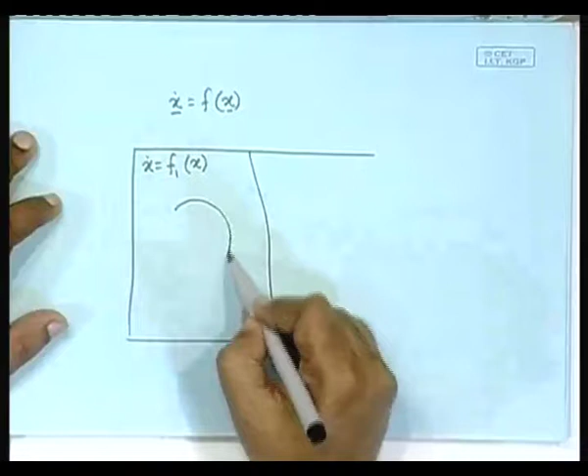And while doing that, if it somehow intersects this, then the equation that governs the evolution of this curve, the state space trajectory, will change to something else. For example, it will then go in some other direction, doing some other thing, and then again when it comes back, again it undergoes a switching and it goes in some other direction. So, you might imagine situations like that where there is some kind of a switching.

Such systems are called switching dynamical systems, also called hybrid dynamical systems. The word hybrid comes in the context where, in the continuous time evolution, there is also interplay between some discrete events, in this case discrete switching events. Now, what happens in such cases?

Now, when we try to understand what happens in such cases, try to picture that such systems will also have to be discretized. That means, you need to obtain some kind of a discrete time description of the system, and we know that discrete time description of the system is obtained by the method of Poincare section.

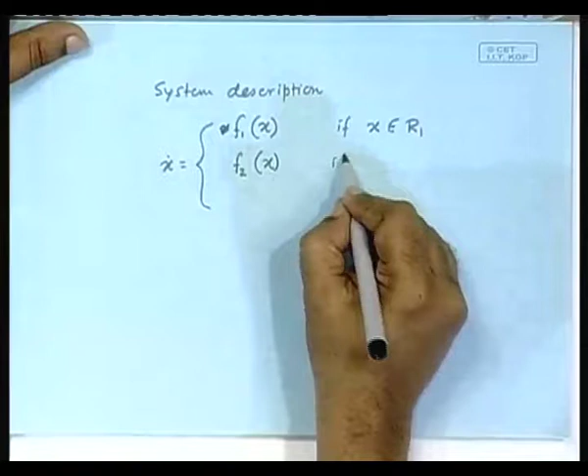So, if there is a system like this, the normal system description would be something like this. x dot is equal to f1 of x if x is in the compartment, say, R1, f2 of x, another function, if the state x is in the compartment R2, and so on and so forth. So, this is the general system description that we are talking about. But first, in order to understand what happens in such systems, let us consider only two such compartments in the state space.

You might imagine what is the practical implication of this. For example, there are a large number of switching circuits; power electronic circuits are switching circuits, where there is an on state of the switch and there is an off state of the switch. During the on state, it follows one set of differential equations. If it is in the off state of the switch, it follows another set of differential equations, and obviously this is the description that we need.

But there are also many other practical examples when this happens. For example, imagine the bouncing ball. Imagine mechanical systems where there is some kind of impact. When there is an impact, it goes a bit to the other side depending on the flexibility of the impacting surface. So long as it is not impacted, it is governed by one set of differential equations, and if it is impacted, it is governed by another set of differential equations.

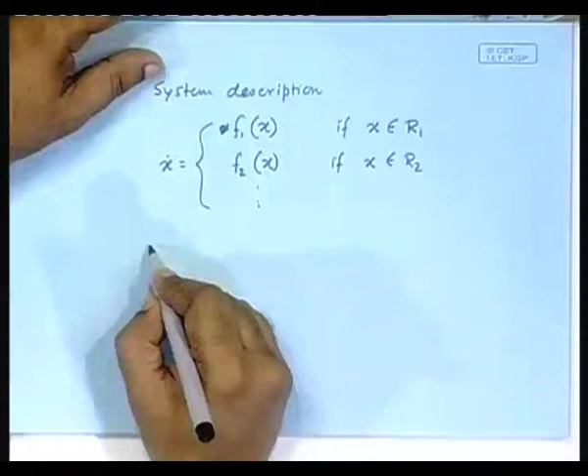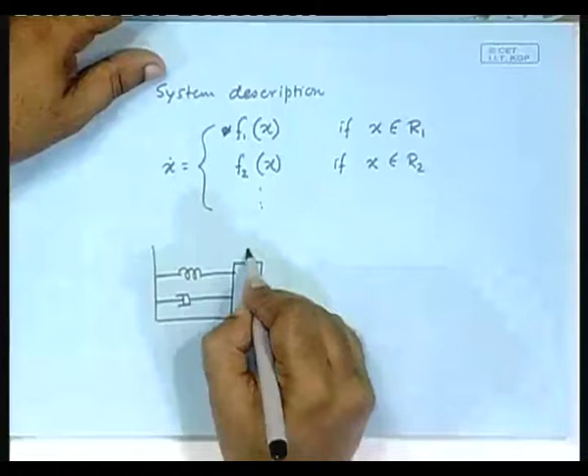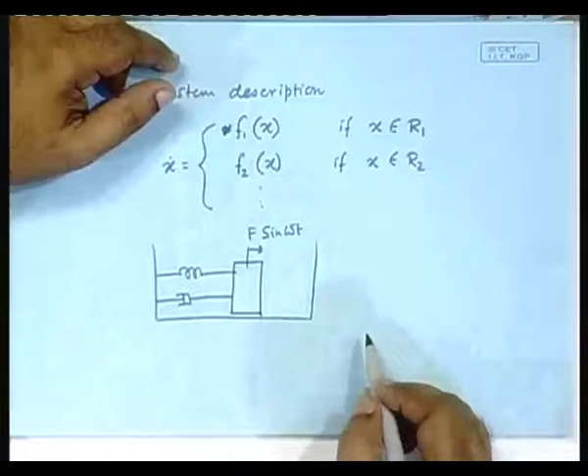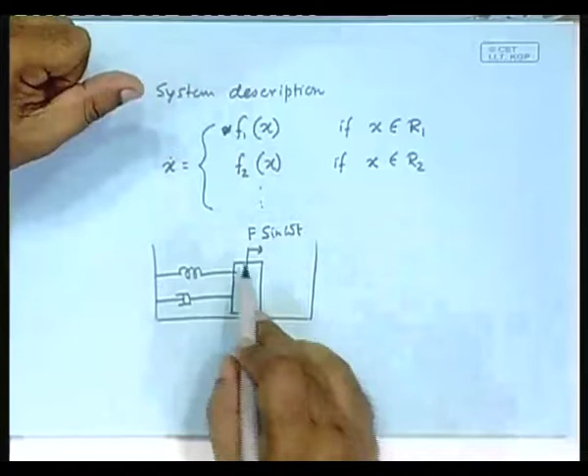Schematically drawing, we would draw it like this. There is one spring and there is one damper connected to a mass, and there is some kind of a force acting, which makes it oscillate back and forth, and there is a wall. So, it could hit the wall and come back. If the wall is rigid, then that will result in instantaneous reversal of the velocity, while if this surface is somewhat soft, then it will go into that, and while it goes into that surface, obviously the system equations change. So, this exactly brings in this kind of description.

You might also imagine the situations of hydraulic systems where there is some kind of closing and opening of valves. So, when the valve is open, it will be one set of differential equations. If the valve is closed, it will be another set of differential equations, and a good example is the human heart, in which there are of course valve openings and closings. There are triggering events; the heart action is started by a triggering action. So, that is also a non-smooth behavior.

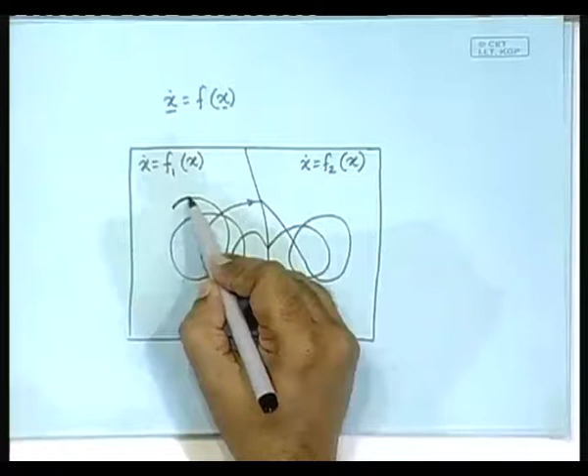So, notice smoothness relates to differentiability. Now, here when it goes within this compartment, at every point this curve is differentiable, right. But the moment it hits and goes in another direction, at this point it is not differentiable. So, at this surface, the switching surface, the behavior is called non-smooth. This word non-smooth should be understood. It means that it is not differentiable on a specific surface or a switching plane.

If the original system is n dimensional, the switching plane can be imagined to be an n minus 1 dimensional hypersurface, so that whenever the state comes and makes a contact with that hypersurface, it goes into another set of differential equations. So, how do we analyze such systems?

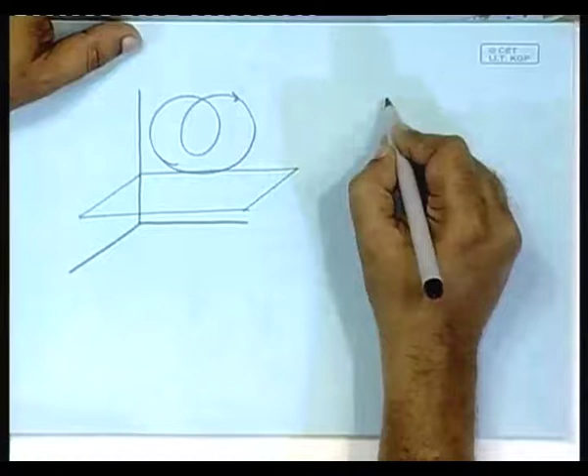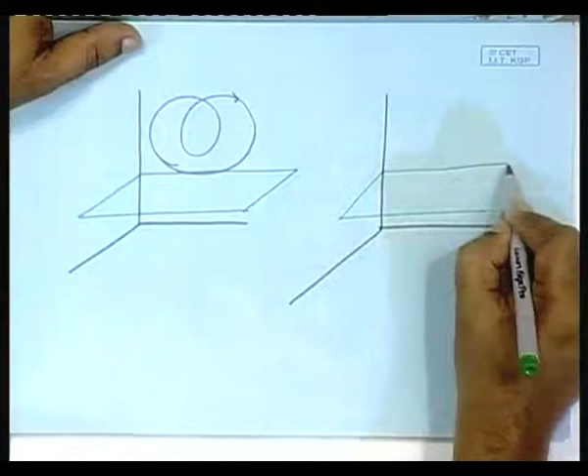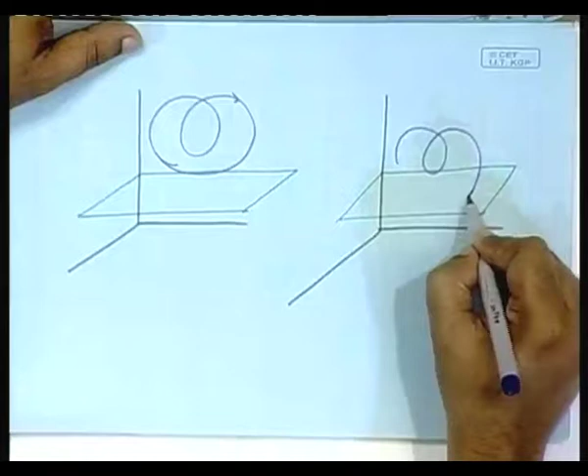But you might also imagine a situation where the orbit is something like this, but it intersects, goes to the other side, comes back and then goes. Now, what is the difference between these two? Obviously, the difference is that it has intersected the switching surface, gone to the other side and come back, and that is how it completes.

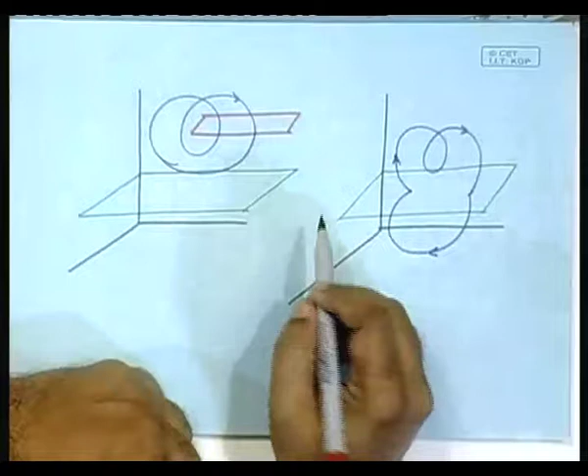Now, in both cases, you might place a Poincare section. For example, if you place a Poincare section here, then you will see the mapping as this point mapping to this point, and you would get some kind of a functional form of this mapping. Now, you might not be able to obtain the functional form in closed form, but nevertheless you know that there is some function that maps from this point to that point. Now, if you do the same exercise in this system, you would place the Poincare section here, and you would now talk about the map from this point to this point.

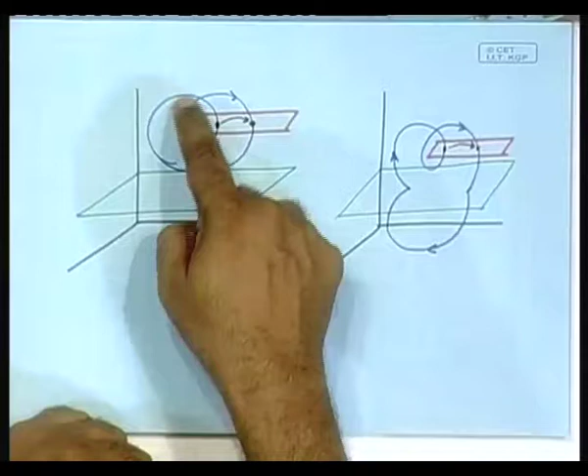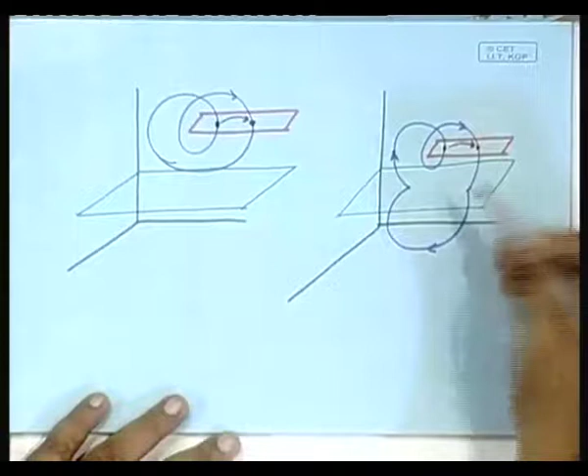Now, just try to understand logically, if you think that there is some kind of an expression for the map, will the two expressions be the same? Obviously not, because in going from here to here, what happened? It went through this and it landed up here, right? While in going from here to there, it goes like this and it comes here. So, all through it goes through one set of differential equations, while in this case, in going from here to here, it comes here, goes across the switching surface, and there is another set of differential equations that describes its evolution, and finally it comes here again.

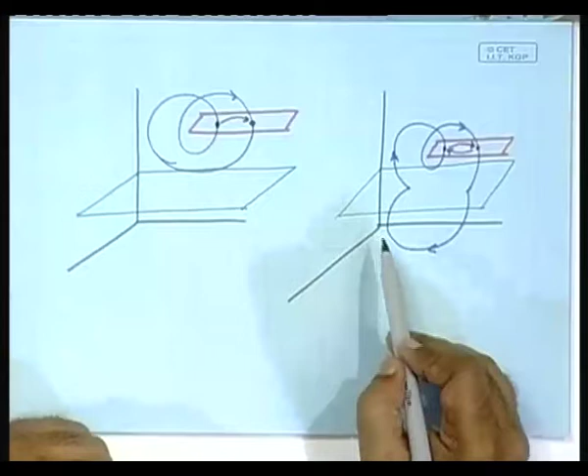So, obviously, in order to find out the map from this point to this point, you would need much more complicated things to be performed, and obviously the functional form will be different. Now, these two different functional forms will have a critical value, where, let me draw on another piece of paper, you might imagine that starting from a point, it just grazes and goes. It does not go to the other side, it just touches, but does not really go to the other side. This orbit will be a critical behavior between these two types of behaviors,

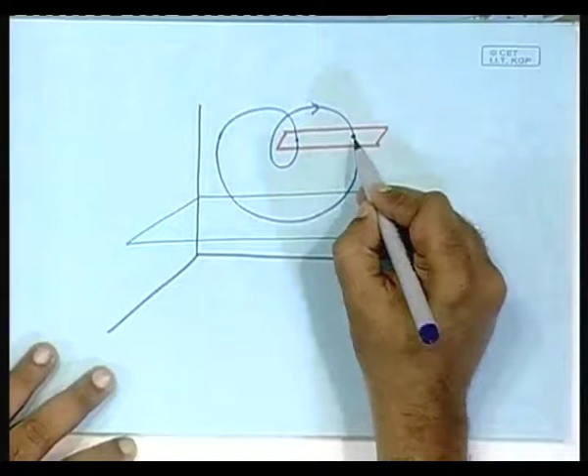and if you place the Poincare section now, it is not difficult to realize that starting from this point, it maps to this point, meaning it goes like this and comes back here. Okay. If you started slightly this way, then it would have not grazed. If you started slightly that way, it would go to the other side and come back. So, this point is sort of a critical behavior between these two different types of behavior, and it is not difficult to see that there can be many such points.

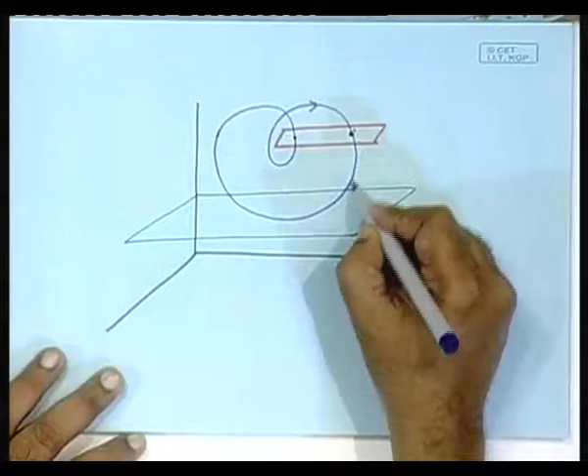That means, there can be another point here which will also have the property that starting from here it will graze and come back here, starting from another point it will graze and come back here. Therefore, there will be a line that will divide these two types of behavior. In this part, it will go to the other side, that means it will undergo the switching. Starting from this side, it will not undergo the switching. And the functional form in this part will be one type like this, and the functional form in this part will be another type like this.

What does it all mean? It means that at the end of the day, you have a discrete time state space. If I now blow this up on the next page, it will be some kind of a description like this, where in this compartment x n plus 1 is equal to some function of x n, and in this compartment x n plus 1 is another function of x n, where x are vectors.

All right. So, what is so holy about it? What is so holy about it is that we know that in such a system, as you change a parameter, the location of the fixed point will change, the local linearization will also change, the eigenvalues will also change, so on and so forth. And we know that when the eigenvalues exit the unit circle, cross the unit circle, you have

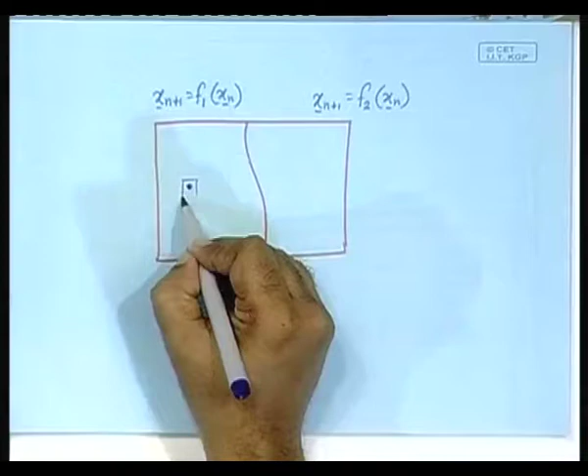bifurcations. So, it might happen that the fixed point is here, and as you are changing the parameter, you are always keeping track of the local linearization and keeping track of the eigenvalues, and as you change the parameter, the position of the fixed point moves, and one of the eigenvalues crosses the unit circle. When that happens, obviously we can explain what happens in terms of what we have already learned.

Why? Because we have already learned that if this is the unit circle, and one eigenvalue goes this way, then what is it? It is the period doubling bifurcation. If this is the unit circle, circle of radius 1, and an eigenvalue goes and hits this way, what is it? It is a saddle node bifurcation.

If you have a unit circle like this and eigenvalues move like that, what is it? It is a Hopf bifurcation or Neimark-Sacker bifurcation, giving rise to the birth of a quasi-periodic behavior. These are all known. So, if similar things happen while the fixed point is in one compartment, we know what happens. But there is also the possibility that with the change of the parameter, a fixed point may come and hit the border, and maybe it goes to the other side.

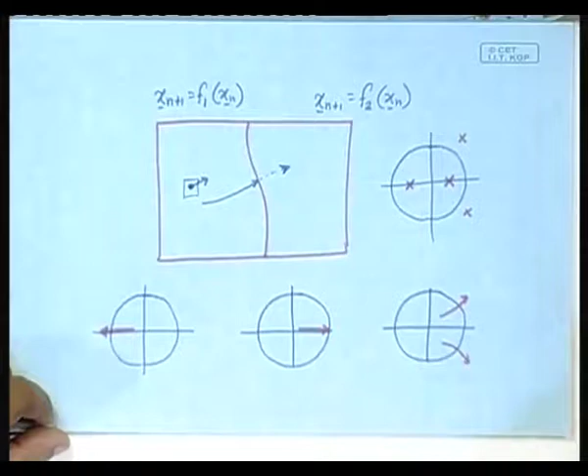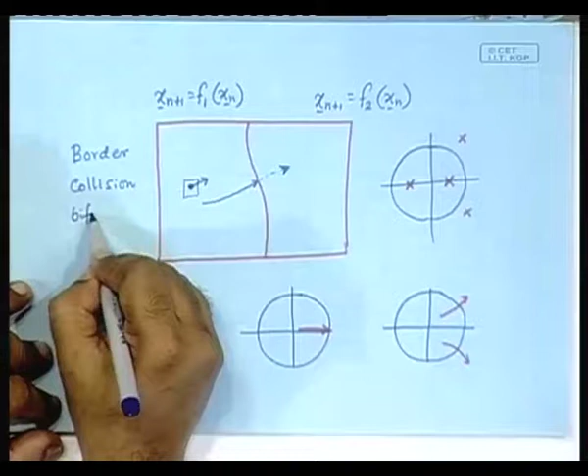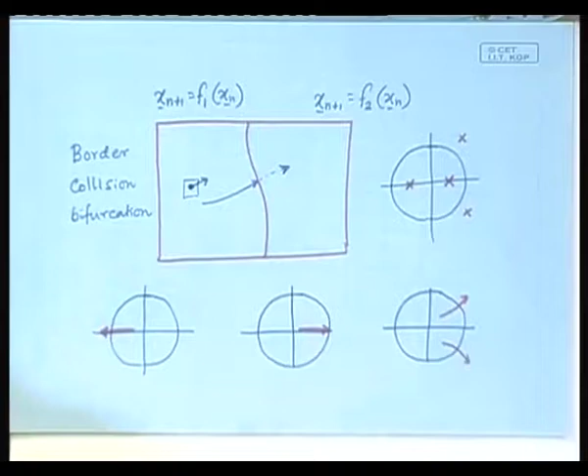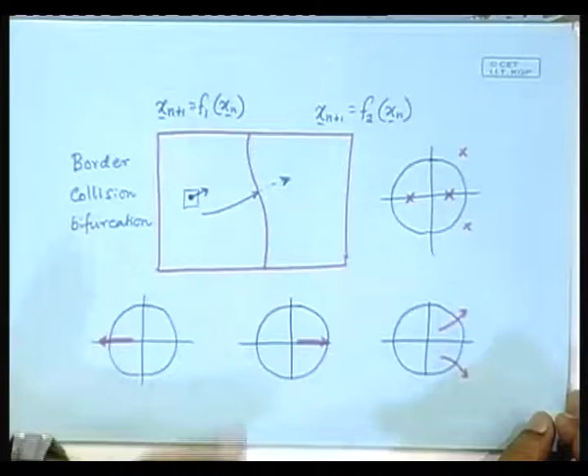All right. Fine. So, let me give an example now. Well, this is a 2D description. Since I have drawn it in 2 dimensions, it means that x is a 2-dimensional vector, x and y. So, here you would say x, here you would say y, and so on and so forth. But there may also be situations where it is just 1-dimensional.

In that case, what does this picture look like? In 1 dimension, you can draw the graph of the map. Say this is x n and this is x n plus 1, and suppose this is the border. That means, for these values of x n, it will have one functional form. For those values of x n, it will have another functional form. So, suppose so long as x n is less than this value, the behavior is something like this, smooth, but at this point there has to be a non-smoothness, the character has to change. So, it might be like this, all right.

So, it is not difficult to see then that in 1D also such things can happen, and let us start to work on this kind of idea, because one dimension is easier to understand because you can draw a graph. But first let me give a very simple example, one that probably I have already done, but nevertheless for this context let us repeat. Let us consider the power electronic boost converter, where you have got a battery, an inductor here, and a switch here.

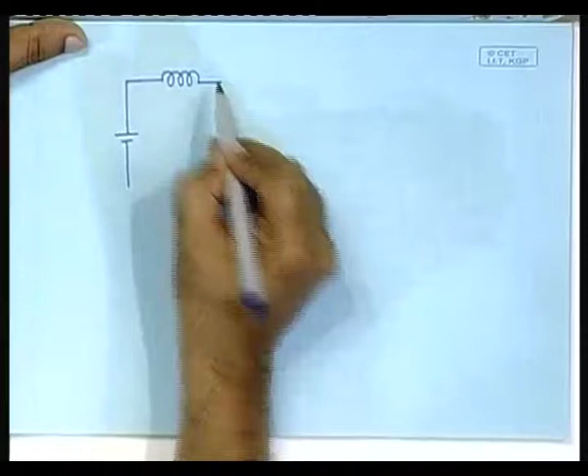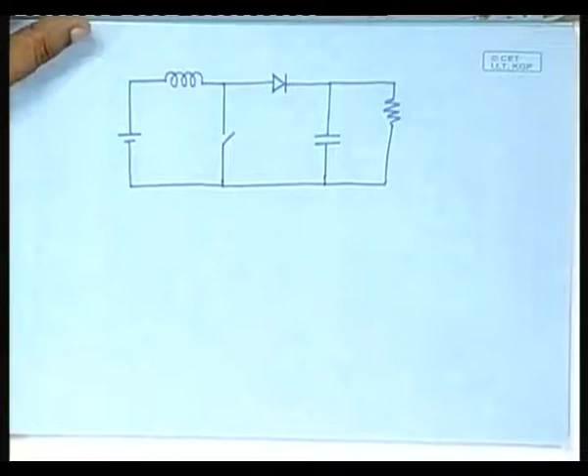Here is a diode, here is a capacitor, and here is the load resistance. This is a load. Now, from this explanation you should recall what happens when the switch is on and off.

When the switch is on, the current through this loop builds up, because the voltage is connected across the inductor. So, the current builds up linearly, and when the switch is off, the whole circuit is connected and the diode is forward biased. So, the current will flow like this, and the energy that has been stored in the inductor will then go to this RC network.

So, the energy shifts from here to here, the energy in the inductor drops, and the inductor current as a result falls. If the inductor current falls, then L di/dt will have a different sense. So, if this was positive and this negative, this will become positive and this negative. As a result, this voltage and that voltage add up, which appears across the load. So, the load sees a voltage bigger than the input voltage. That is the concept of the boost converter.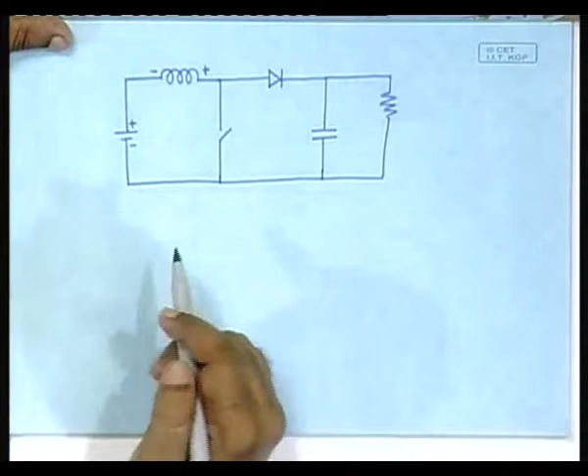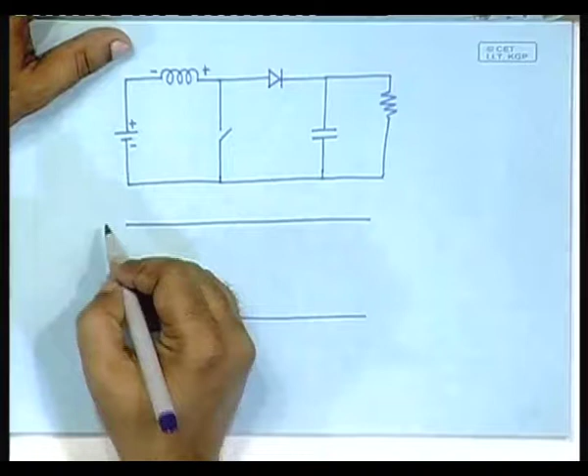Now, often the control of the switch is done by what is known as current mode control. I am not showing the circuit, but let me illustrate the principle with a diagram. Suppose I am drawing the current waveform, this is the 0 level, and there is a reference value, I reference. There are also periodic clocks, so let me draw the clock instants all through, so that it is clear.

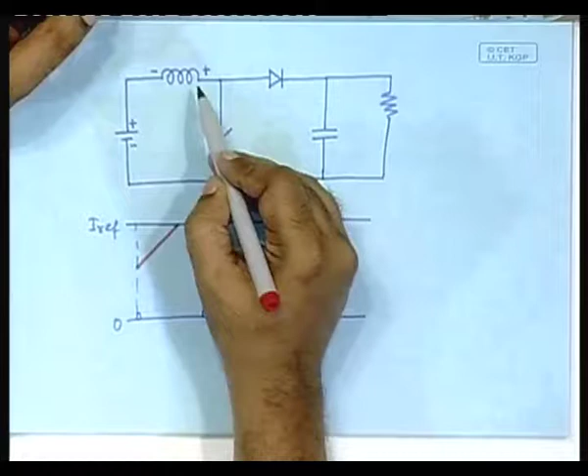Now, at a clock instant, the switch is turned on. So, the inductor current goes up, and when it becomes equal to the I reference, the switch is turned off, which means it goes like this. Again it turns on, again it turns off, again it turns on, again it turns off. Let me draw some more.

Again it goes, but now imagine that it does not reach the I reference before the next clock comes. In that case, it stays on, and then it turns off, and so on. So, that is the kind of switching logic that is followed, and this red line would be the current through the inductor.

Now, suppose I want to obtain the discrete time description of such a system. How will you do it? We will have to sample it, because this is a non-autonomous system. There is an external clock, and we have learned that whenever there is an external periodic input, it is a non-autonomous system, and the discretization has to be done by placing a Poincare section in synchronism with the external periodic input. So, we observe from this point to this point to this point and so forth.

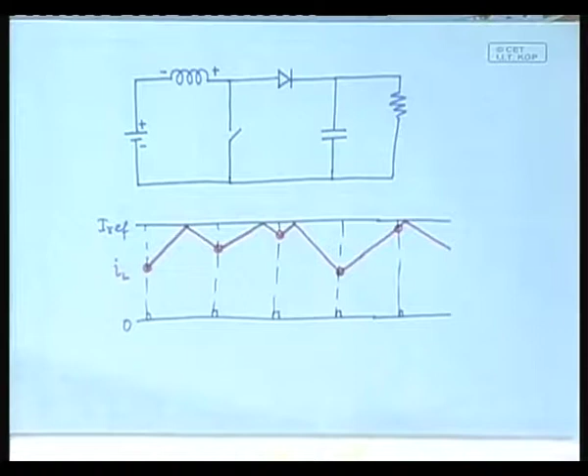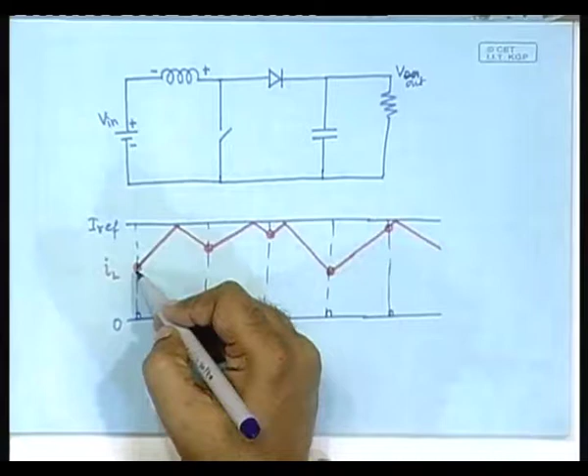Now, it is not difficult to see that if the capacitor is large, the voltage here would be held almost constant. If we proceed under the assumption that the capacitor is large, and therefore this voltage V out, with V in as the input, is more or less constant, then this will really be a straight line, and the straight line will have a slope of V in by L.

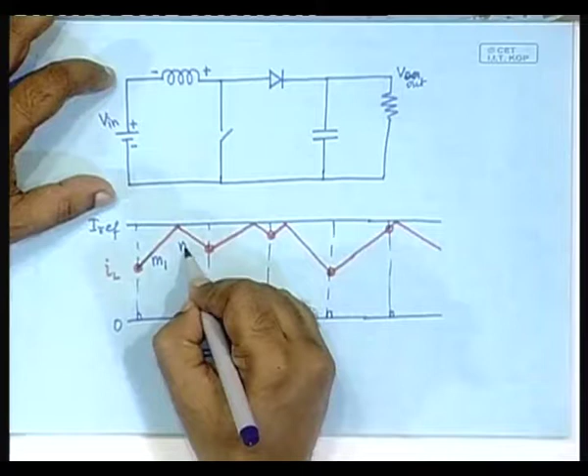So, here the slope is M1, where M1 is equal to V in by L, and here when it drops, it is V out minus V in by L. So, here the slope is M2. In that case, if you try to obtain the discrete time description, recall we have done that already. How will we proceed? We will first have to obtain this time. Is that visible? Yes.

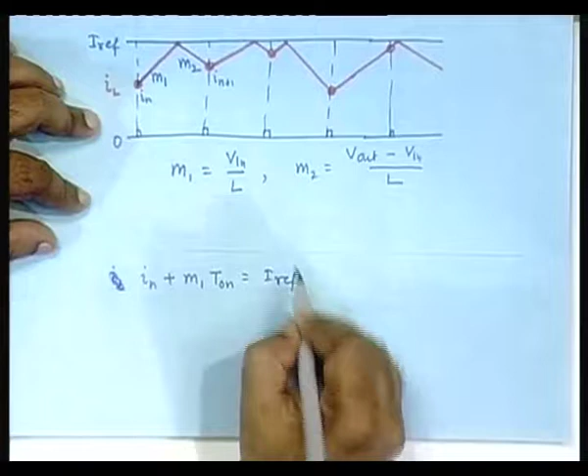So, we will say I L at the nth time instant is I n, and we are trying to find I n plus 1. I n plus M1 T on is equal to I ref, since it has reached I ref, which gives me T on. So, how much is the off time? That is the total clock period T minus T on. So, T off is equal to T minus (I ref minus I n) by M1.

Then what is the final value? I ref minus M2 times T off. So, I n plus 1 is equal to I ref minus M2 T off, which is T minus (I ref minus I n) by M1.

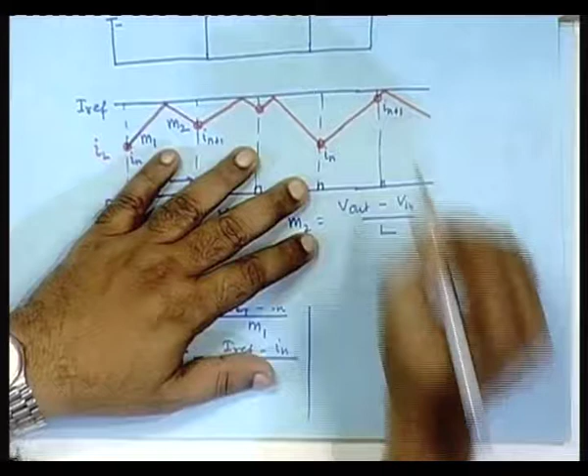Okay. But this is only half of the story, because there is also a possibility of evolution like this, which means that it does not reach the I reference before the next clock. Now, if that is happening, in that case, if I take this as my I n and this as my I n plus 1, then what will be the I n plus 1 in that case? In that case, I n plus 1 can be straightforwardly written as I n plus M1 capital T.

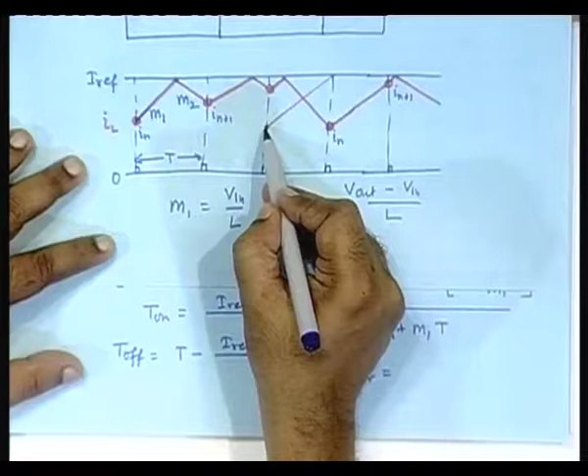So, you can see that there are two possibilities, one where the map will be given by this, two where the map will be given by this, and the critical distinguishing behavior would be one where starting from a point here, it reaches exactly at the next clock. So, I will say I border is, can you say what will be this value? It is essentially that value to which I will add M1 capital T, and I will reach I reference. So, this is I ref minus M1 T. Okay.

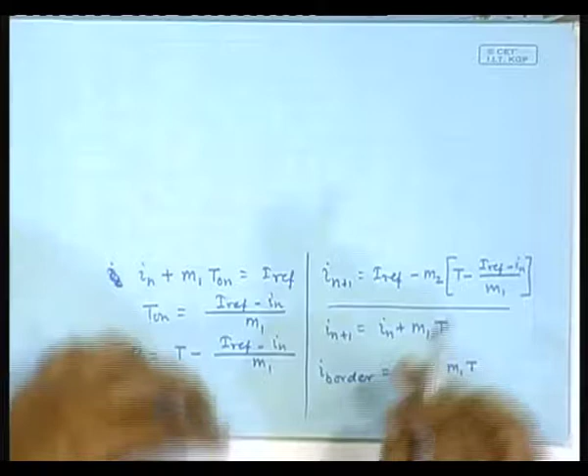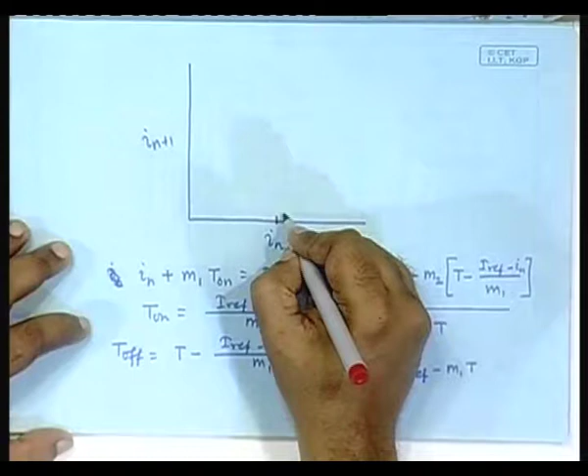Fine. So, here you have the final description of the system. These are the two compartments and this is the borderline condition. So, let us draw this graph. I n versus I n plus 1. Somewhere there would be the borderline case, say the borderline case is here. So, this is I border. Below I border, that means if the initial condition is below that, obviously it reaches like this. So, you have to take this equation, I n plus M1 T.

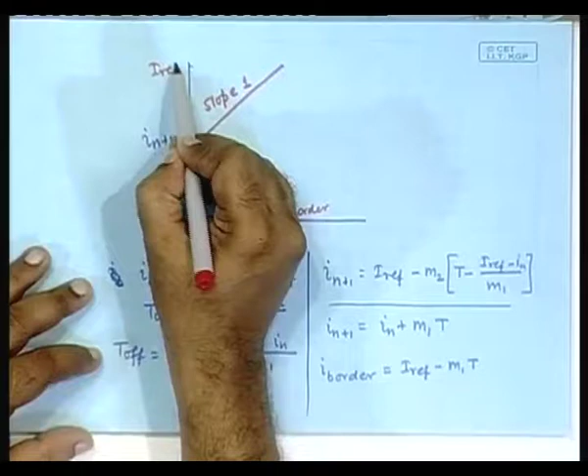What will be the graph like? The slope of the graph will be 1, and plus M1 T. So, it will go something like this. Here the slope is 1. And it will reach I reference. Okay. So, this is the borderline situation where it reaches. So, if you put I border here, in this case you see that M1 T cancels off, you get I reference. So, finally you get I reference.

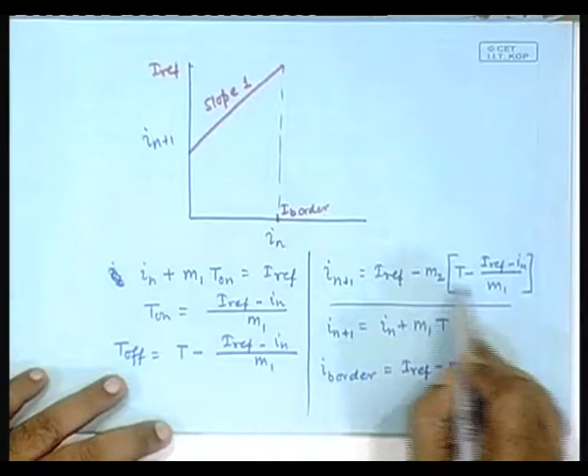After that we have to take this equation. You can see that these all parts are constant, only this one is a variable part where the slope is minus M2 by M1. So, here the slope is minus M2 by M1 times I n. So, it will be something like this where the slope is minus M2 by M1. Good. So, this is the graph of the map for this practical system.

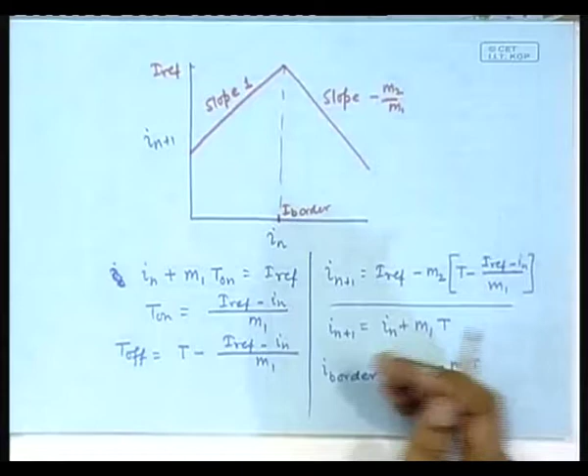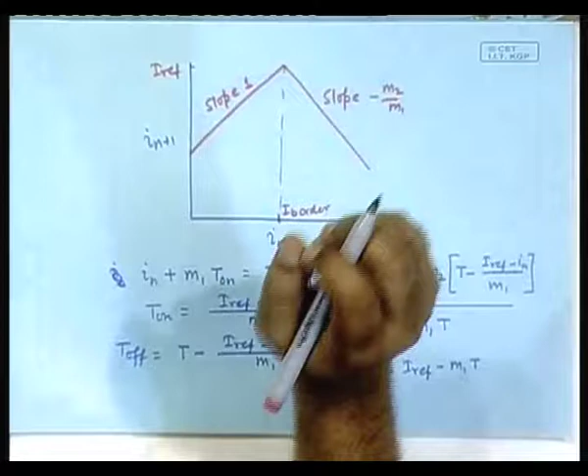See the similarity: we had said that a normal piecewise smooth map would be something like this, only in this case after the simplifying assumption that the output voltage is kept constant, we see that both the sides are linear, but nevertheless it satisfies the definition of piecewise smooth. So, we need some kind of a theory for the bifurcation that will happen when the fixed point will hit the border, that means when the border collision will take place.

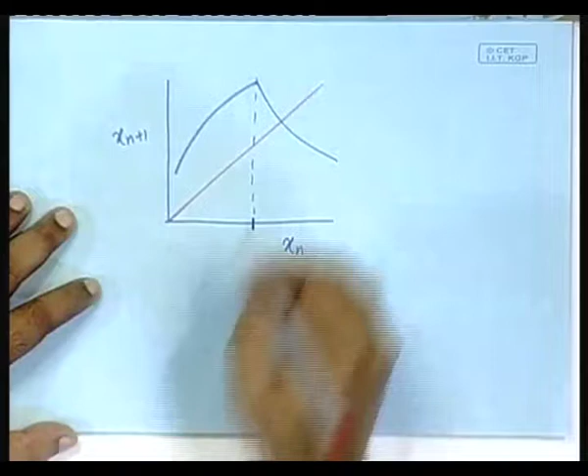Let us see, when will the border collision take place in this case? Fixed point, where is the fixed point? Simple, draw the 45-degree line. So, here is the fixed point. Now, with the change of the graph of the map with the change of the parameter, if it so happens that at some point it changes and becomes like this, then as you change the parameter, you can see that there is a border collision occurring. So, we will try to understand the character of that.

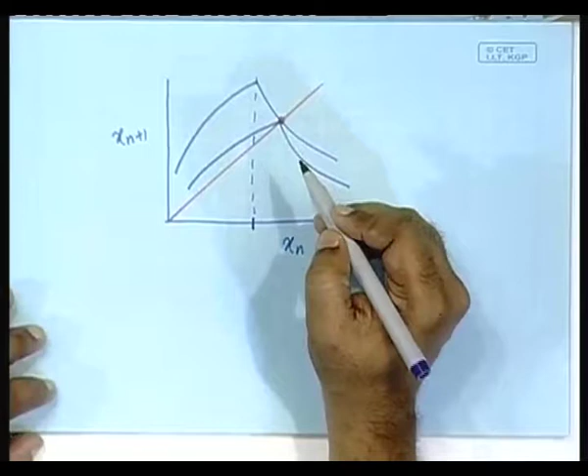Now, it is not difficult to see that the event that will occur exactly at that point is in no way related to the character of the graphs in these parts. It is only related to the slopes here. That means the local linearization in this chunk and the local linearization in this chunk. Okay. In fact, that is what is normally used. It is to our luck that it is already linearized, but in most situations it might not be linearized. So, in order to understand what really happens, I do not need to consider the whole graph of the map, I only need to consider the linearized chunks.

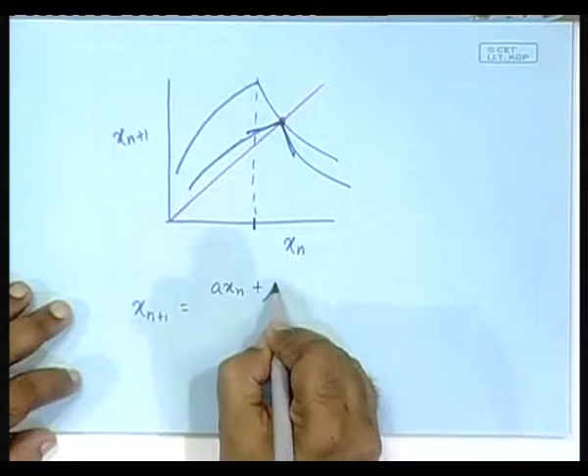And if you make some coordinate transformation, this piecewise linearized map can be expressed as x n plus 1 is equal to a x n plus mu for x n less than 0, and b x n plus mu for x n greater than 0.

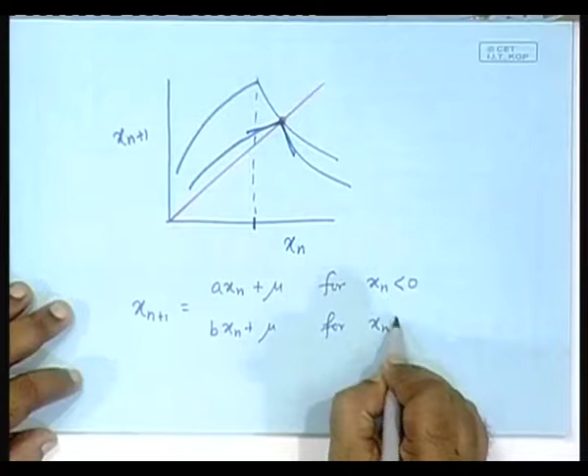That is why this form is called the normal form, because just by using this you can exactly understand the character of the border collision bifurcation, which orbit remains, which orbit exists, which orbit would be stable; all that can be understood just by considering this simple map. So, let us from now onwards consider this simple map.

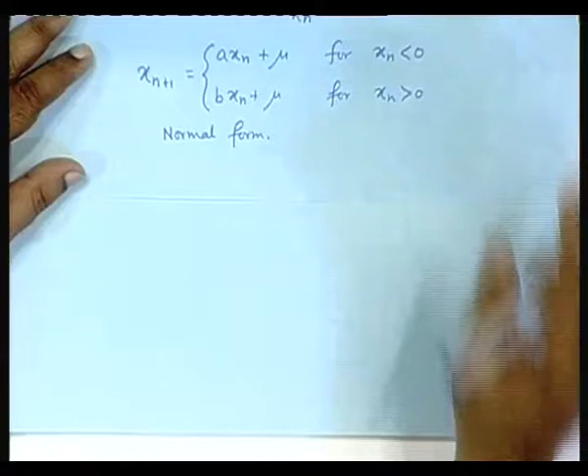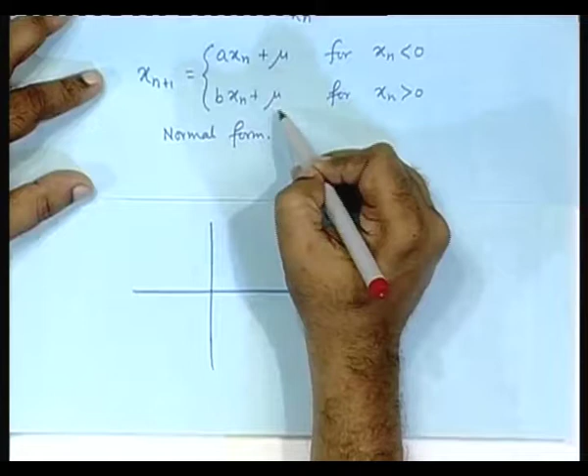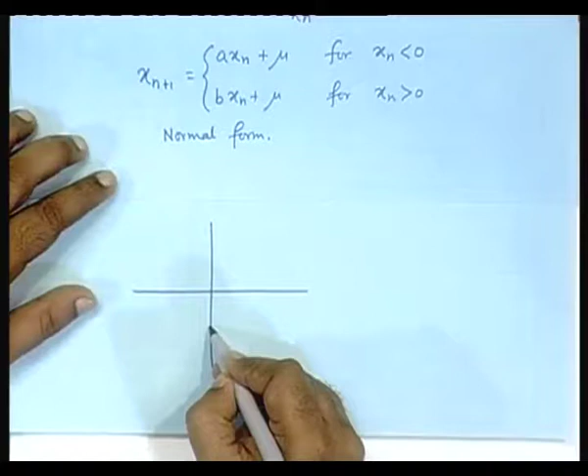Can you see? Yes. Okay. What will be the graph of this map? Obviously, that will depend on A and B, but it is not difficult to see that it will be the graph of the map. Okay, what is the result of variation of mu? Mu is the parameter, and the whole graph of the map goes up and down. So, you might say depending on the value of A and B, the graph of the map is like this here and like that here. As you change mu, it goes here and here.

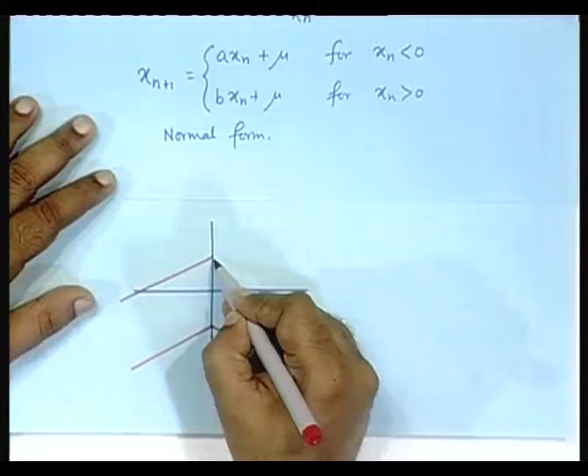So, this point represents the critical value of mu at which, if you draw the 45-degree line, it will be clearer, the border collision takes place. Just look at the result of the variation of mu. Initially, when mu was negative, the fixed point was here. As mu was increased, this graph goes up.

It is not difficult to see that the intersection with the 45-degree line will go closer and closer to the y axis, and at this point, when mu is equal to 0, this is the border line; the fixed point collides with the border line. So, border collision occurs at mu equal to 0, and after that the fixed point moves here. Fine.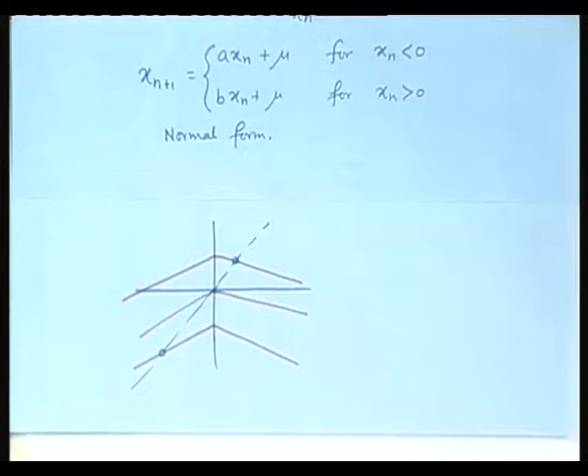So, depending on the value of A and B, we can then identify the different bifurcations that will take place. For example, in this case, what will happen? While mu was negative, the fixed point was given by the slope A, and when mu was positive, the fixed point is given by the slope B, and in this case, the way I have drawn,

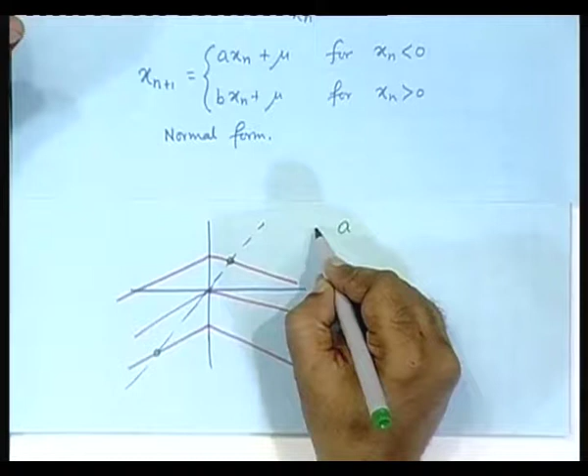A is positive, between 0 and 1, and B is negative. So, in this case we have drawn B as greater than -1 but less than 0. That is how we have drawn it. And in that case, in the bifurcation diagram, what we will see is a stable fixed point, and on the other side also a stable fixed point.

So, if you draw the bifurcation diagram, you will see something like this. This is the bifurcation diagram that I am drawing, not a picture like this. Here it is x n versus x n plus 1, but here I am drawing mu as a parameter which is being varied, and here the x n. You will see that there is a stable fixed point existing for negative values of mu.

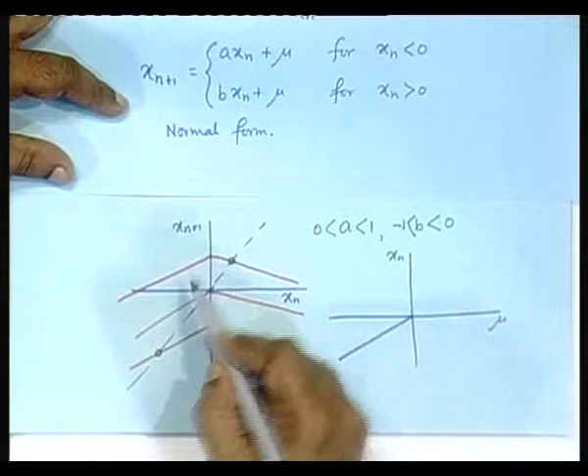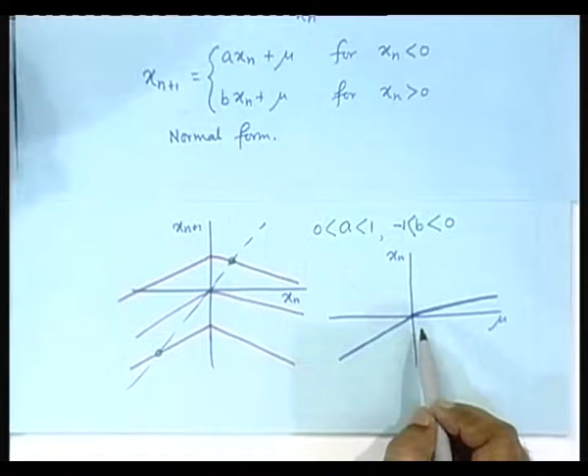So, it will go like this, hit it, and then there will be a stable fixed point existing on the other side also, like so, but notice that the slope will change. So, a stable fixed point remaining a stable fixed point, but the slope undergoing a change. These kinds of events are very often seen. There is a bend in the bifurcation diagram. These are often caused by border collision, but these are not dangerous, because these are situations where the fixed point remains stable.

It is not difficult to see that such situations will occur where A lies between -1 and 1 and B also lies between -1 and 1. Okay. So, we might draw a parameter space with A and B as the axes, and we would say that if the parameters are chosen within the box given by -1 to +1 and -1 to +1, then the fixed point will remain a fixed point.

Good. What if I choose a parameter, say here? Notice where the parameter is: A will be greater than +1 and B will be less than 0, that means negative, but greater than minus 1. So, what will be the behavior? Let us try to figure it out.

A value greater than plus 1. So, B value between 0 and minus 1. Good. Now, you see at this situation there is no fixed point. As it goes up, there will be a time when the graph of the map will look like this. The fixed point only critically starts to exist, but when it has crossed 0,

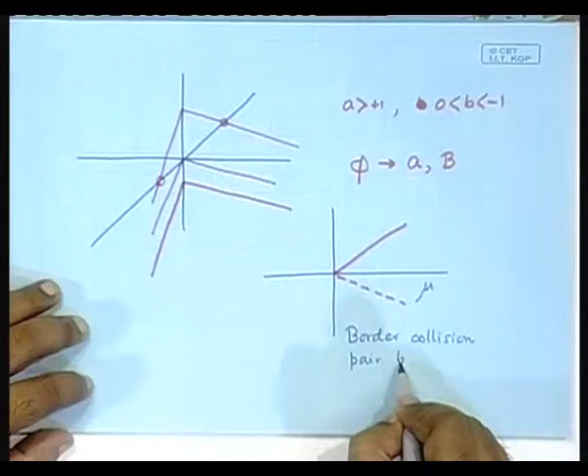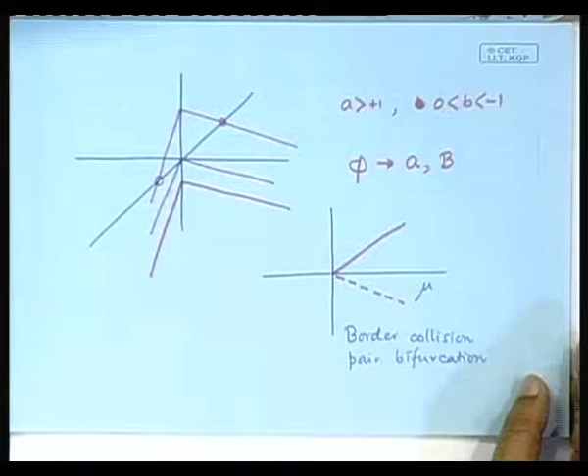Fine. Now, in this part you expect a situation where a pair of fixed points are born, out of which one is stable. So, that is what you will actually be able to see. Now, imagine that you change B to a value somewhere here. So, what is the situation? A is greater than plus 1 and B is less than minus 1. Let us see what happens then.

Now, the situation is A is greater than plus 1, B is less than minus 1. When it is crossed, it will be like this. Notice now two fixed points are born. In this situation there was no fixed point, there was no intersection with the 45-degree line. But the moment it has crossed mu is equal to 0, you will have two fixed points, but both unstable.

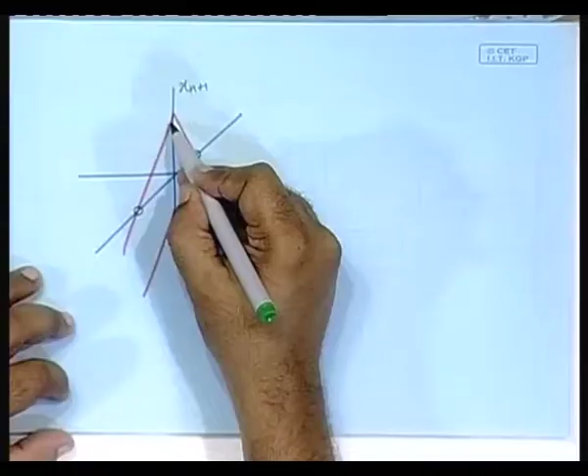Will any periodic orbit occur? No, because if any periodic orbit had to occur, then it will have some iterates falling here and some iterates falling there. For the iterates falling here, there will be local stretching because the slope is greater than 1. This neighborhood, when it maps to here, here also the slope is greater than 1. So, all the neighborhoods will always expand, and therefore, you cannot have any high periodic orbit that is stable, impossible.

Can there be a chaotic orbit? Well, a chaotic orbit will occur only if the orbit is bounded. Will it be bounded? Notice that any initial condition here will tend to go like this. So, it will go away from here. Any initial condition here will tend to go like this. So, it will go towards that. Therefore, there is a possibility of the orbit being bounded, because from this side it goes to the right, from this side it goes to the left. So, obviously, it has a possibility of remaining bounded. If it is bounded, the behavior will be chaotic.

But over the whole range, there is also the possibility that if any iterate falls here, it will in the next iterate go here and will come here. And in the next iterate, if it lands up here on this side, then there is no problem. But if it lands on this side, then it goes out, right. So, there is a critical value. As you keep on changing the values of A and B, there is a critical situation where the orbit may become unstable. Notice what is the kind of instability.

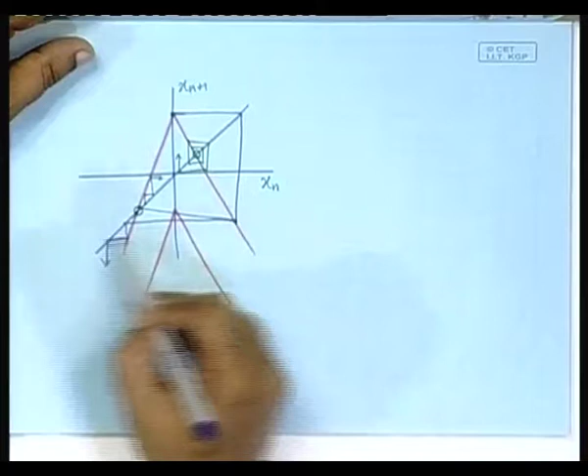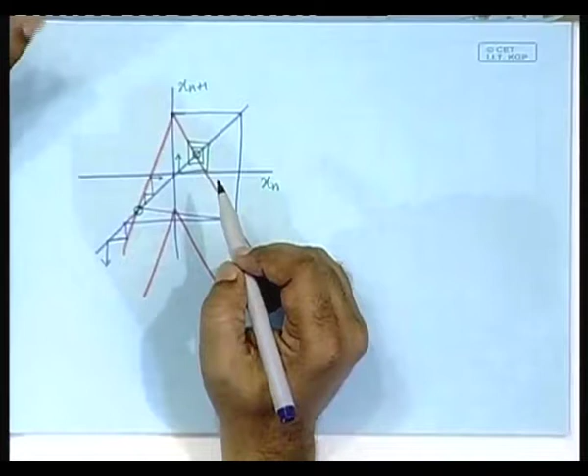That is an unstable chaotic orbit. So, the critical difference between the stable chaotic orbit and an unstable chaotic orbit will be where this point maps to. If it maps to a point outside, it will become unstable. If it maps to a point inside, it will remain stable.

I leave it up to you to find out the condition under which the chaotic orbit will remain stable. Okay. So, you will do it before coming to the next class. It is a very trivial thing, trivial trigonometry to be done. So, we were plotting it here.

In this part we are considering, under some conditions there will be a stable chaotic orbit, and under some conditions the chaotic orbit will become unstable, and as a result there will be no orbit that is stable.

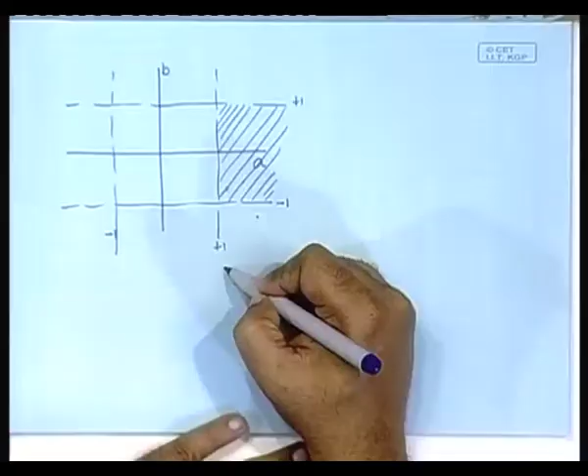And I can tell you, you obtain the condition, it comes to be something like this. So, that in this region you have a stable chaotic orbit. In this part, there is nothing stable. Okay, let us consider the situation here.

Say I have chosen a point here, which means that A is between 0 and plus 1, while B is less than minus 1. A is between 0 and plus 1, like this, and B is less than minus 1, like so.

Notice that for mu less than 0, the fixed point exists. When it goes to the other side, so what is the result? As this mu changes, this whole graph goes up, this point moves this way, and finally at mu equal to 0, this one moves to the other side. There is a fixed point, but it is now unstable. So, at this border collision, the fixed point loses stability.

Okay. But here, since the slope is less than -1, even though it did not go exactly through the -1 point, it jumped across the -1 value, you might imagine that this is something similar to the period doubling bifurcation. But whether the period 2 orbit will be stable or not depends on what? If it is a period 2 orbit, there will be one iterate here, another iterate here. Here the slope is A, here the slope is B.

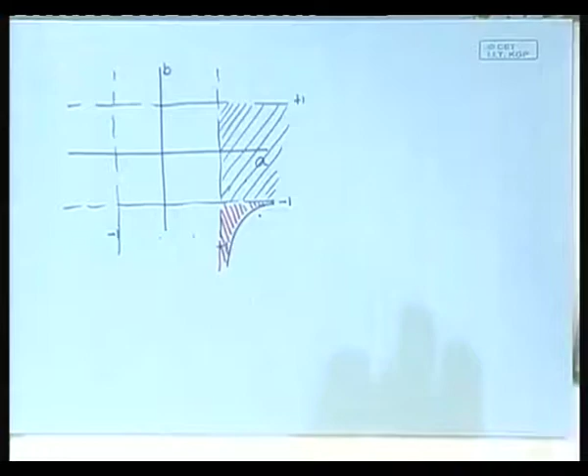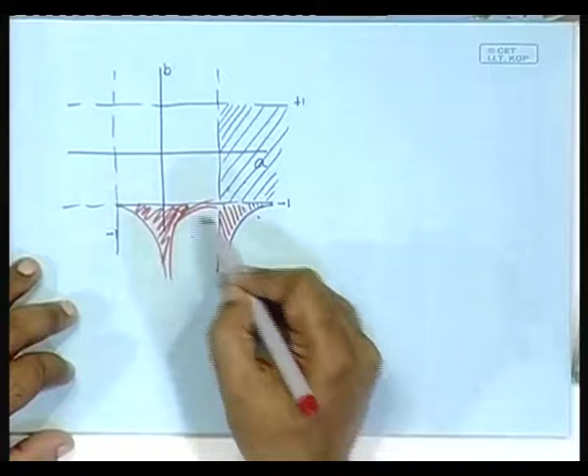So, the period 2 orbit will be stable if AB is less than 1, or we can say mod of AB is less than 1. Now, this means that over this whole range, you will not really see a period doubling. You will see a period doubling only if the mod of AB is less than 1, and that yields a range something like this. So, in this range it will be period doubling, but in this range it will not be. The period 2 orbit will be unstable.

If the period 2 orbit is unstable, is it possible to have a period 3 orbit? Well, not impossible, because there may be 2 iterates on this side and 1 iterate bringing back here. But in that case, how would you obtain its condition of stability? With 2 points to the left, A squared, and 1 point to the right, B, this magnitude A squared B has to be less than 1. So, this is for period 3.

Not only that, you also have to worry about whether the period 3 orbit exists. In order to find that, imagine an orbit something like this: 1, 2, I am not able to draw, but nevertheless 2 points to the left, 1 point to the right.

So, you will have to write down the equations as x n plus 1 is equal to A x n plus mu, x n plus 2 is equal to again A x n plus 1 plus mu, x n plus 3 equal to, now it is on the right side, B times this plus mu, and this has to be the same as x n, then only the period 3 condition is satisfied.